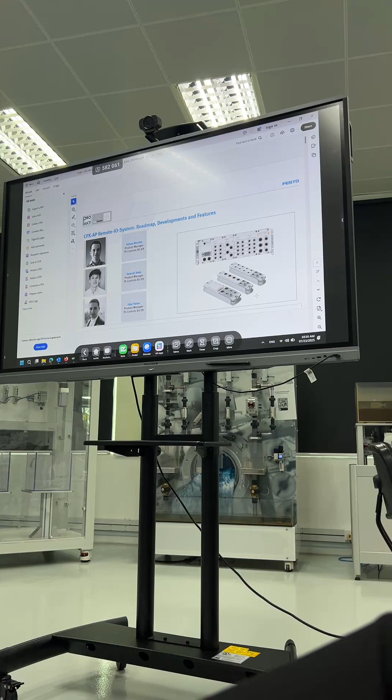For CPX APA, it will become like a modular or centralized unit. As you can see here, this is decentralized, and then we have a modular one.

This is to replace our old CPX classic system. But as mentioned, we still can't fully replace it yet, because a lot of the I/O modules are still not released. We still do not have an analog output or the NPN digital input or NPN digital output. But right now we will start to see a lot of new sales.

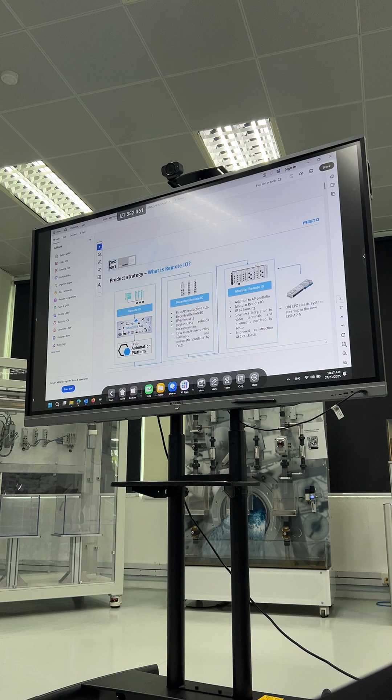So basically, for example in Vietnam, you also have a few cases about the CPX AP-I or VTUX, right? So lately we will see a lot of support regarding this kind of module.

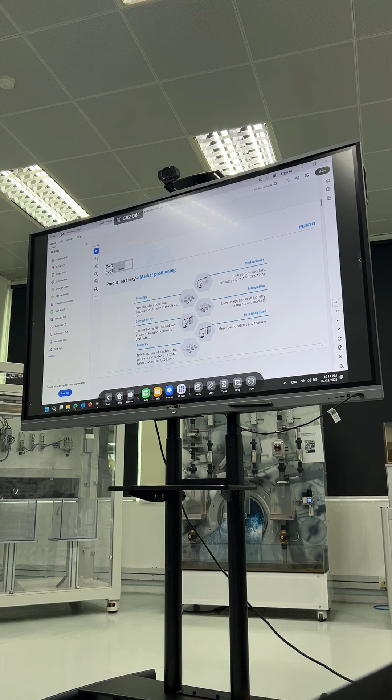So let's see this last cycle. This is the same as the CPX API. We have the same thing like the topology, compatibility, and so on. Not important. So why AP is because of lower cost and higher performance.

Then we have integration for all common PLC, like we mentioned, the EtherCAT, Profinet, Ethernet IP, and Modbus TCP. And this is also our new products, future products, and there will be a lot of improvement on it.

Such as predictive maintenance, because for VTUX we would have a life cycle there, product life, the valve life cycle. So every time you trigger it, the life cycle will count. Did Yikai mention this yesterday? So for VTUX, previously we couldn't do that with our old valve terminal, but when we use VTUX.

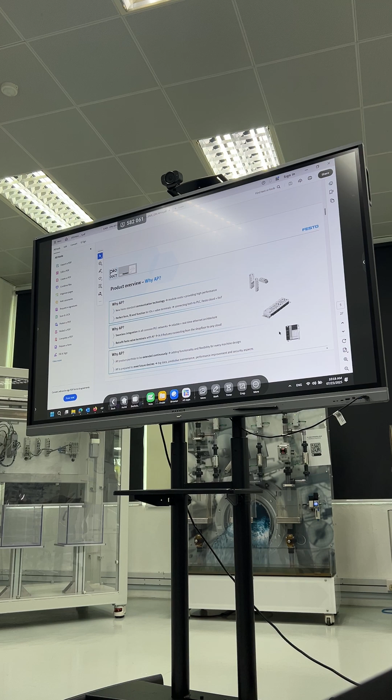Especially on the parallel one, we have two - serial and parallel. For serial, you can read a lot more information.

So one of the things for serial is that we can set what is the life cycle for the valve. For example, we set it as 100,000. After the valve has turned on and off 100,000 times, it will give us a warning.

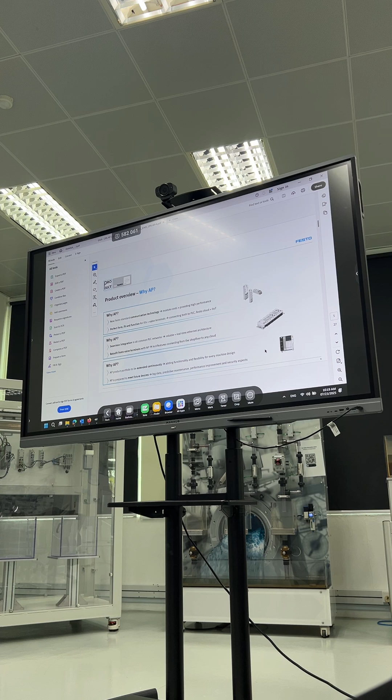So maybe that's the time you can do preventive maintenance, like replace the valve or something like that. This is something we can only do with AP communication, but if we are using the old CBus, the communication is already so limited, so we can't get more additional information like this.

So same like when we have VTUX, yesterday Yikai also mentioned that we could have attached a vacuum generator there. With vacuum generator, you could do a lot of configuration when using parallel, and all this is possible because we are using AP communication.

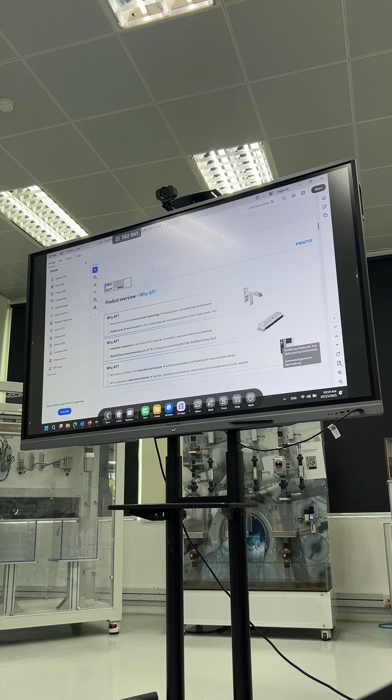If we are using the old CBus, with such limited bytes, there's a lot of things that we couldn't control. Okay, so that's why we need to use AP.

And basically for CPX AP, the setup is not just that we can only use with VTUX, you can also use with certain valve terminals like the VTSA, or the MPA-S valve terminal. But of course, when you are using this valve terminal, it is converting from AP to CBus, because these valve terminals are still using this old CBus.

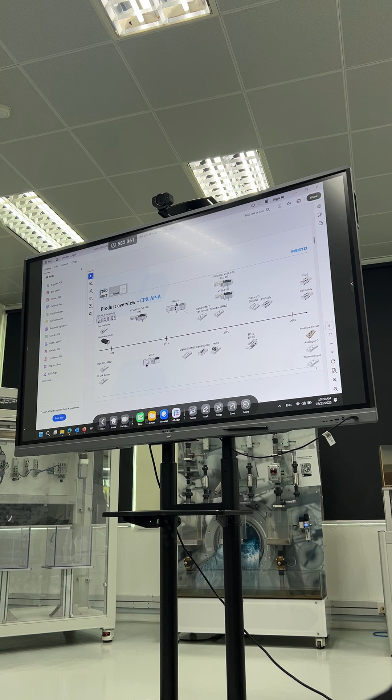Some have the new technology, but some are still using the old one. But if we are using the old one, then there's still some limitation on the valve side.

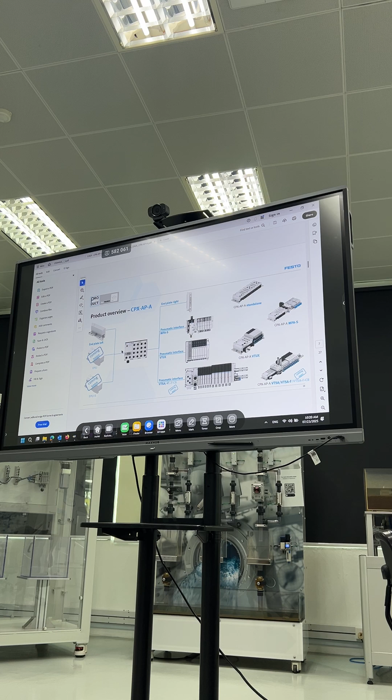But there is still a capability for your AP fieldbus to communicate with more modules. But due to its mechanical limit, you can only have up to 15 modules.

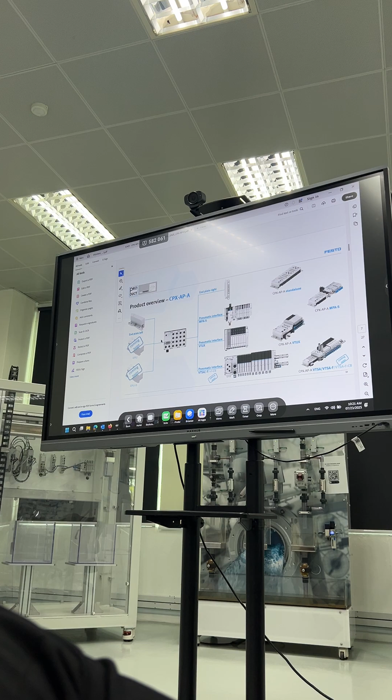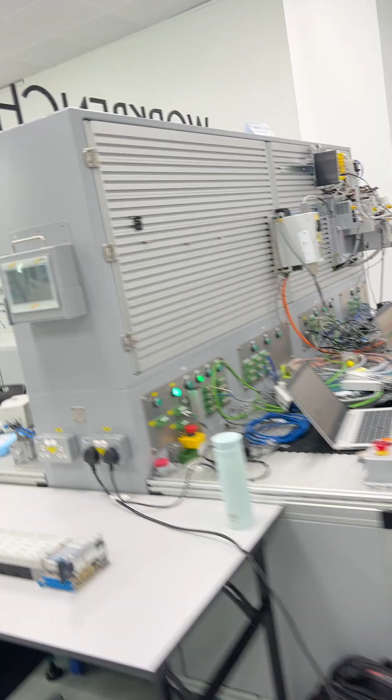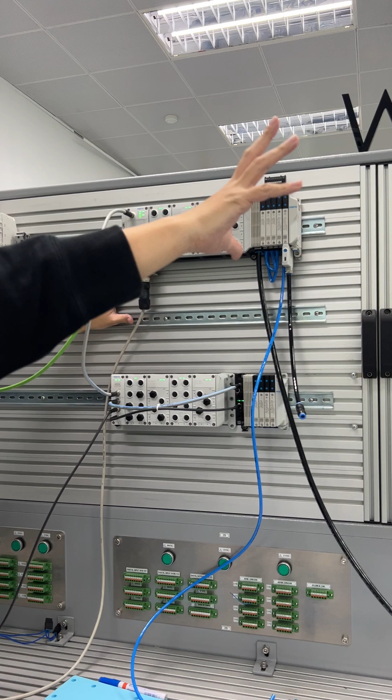So what it does is like how we mentioned with VTUX, we can communicate with AP communication also. So this is like you're connecting, for example, this set of I/O modules - it can be attached here, but if you've already reached the limit of 15 modules and still want to add additional I/O without adding a fieldbus interface, because a fieldbus interface is much more expensive compared to just an I/O module - I think the price is two or three times higher - that's why we can use this.

So this is not a fieldbus interface, it's an AP interface. So from here you have an AP communication. This port - I think last week someone asked about its function - this port is actually the AP communication. For APA, when you connect your I/O module here, this is AP communicated, but you can have the AP-com here connect out to another AP interface to increase your I/O module count.

Or you can also connect this one to the API. Because for example, you see API here, we have a power supply port and the AP-com port. So for this port, you can connect to the AP-com port, then you can have an additional decentralized unit to use together with your APA module.

Does it have any limit for the connection for each? Still like 75 - yes, so that means if you have 5 modules here, you can go out to up to 75. Or you can connect like this, but it's the same, up to 75, but we have a limitation of each set - you can only have up to 15, as mentioned just now. Is it clear? Yeah, all right.

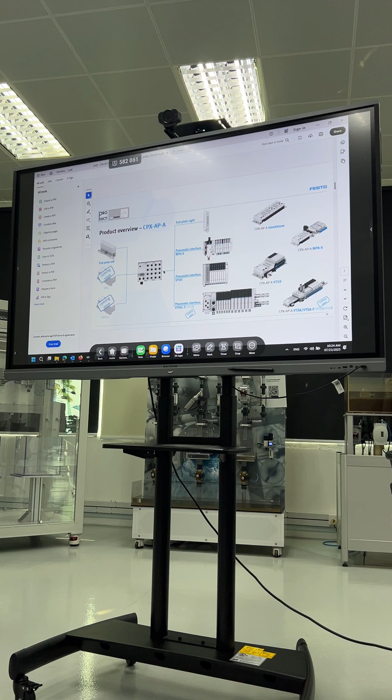So as you can see here, you can either put an end plate to end this CPX-AP-A, or connect to a pneumatic interface, which is an MPAS, or connect to VTUX or VTSA. So all this needs some module to attach it to the CPX-AP-A. When connected together, they become like CPX-AP-A with VTUX, and CPX-AP-A. So the front part, the remote I/O part, is CPX-AP-A, but the valve part is MPAS. Same here, this is CPX-AP-A and VTUX.

Okay, so these are not coming soon anymore because they're already released - this is an old slide, that's why it still says coming soon.

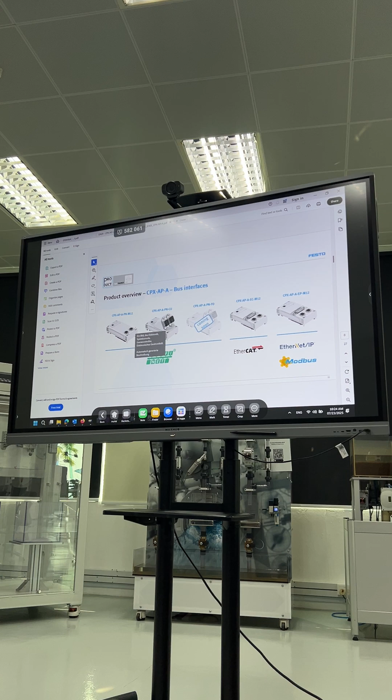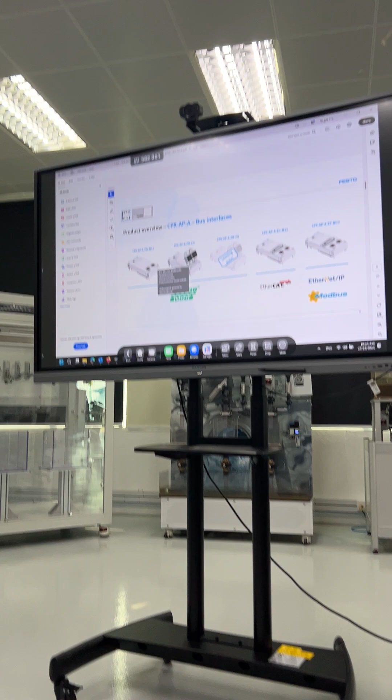So then we have the bus interface, same like the CPX-AP-I. There's a slight difference: if we have a CPX-AP-I with an EP and I want to switch to EC, I would need to switch the whole module, everything, together with the power supply. But if I have EC here and want to change to PN, I just need to take off the upper module - the sub-base is the same, it's modular for everyone. You just need to take off the interface and change to whatever interface you need, then your whole I/O module can be used for that interface already.

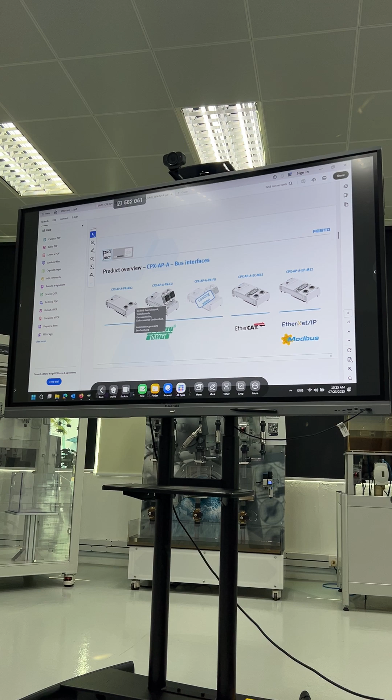Okay, also one thing about the I/O module - later you can try to take up one of it, disassemble it and play with it. It works like a Lego, I mean of course not as fragile as Lego.

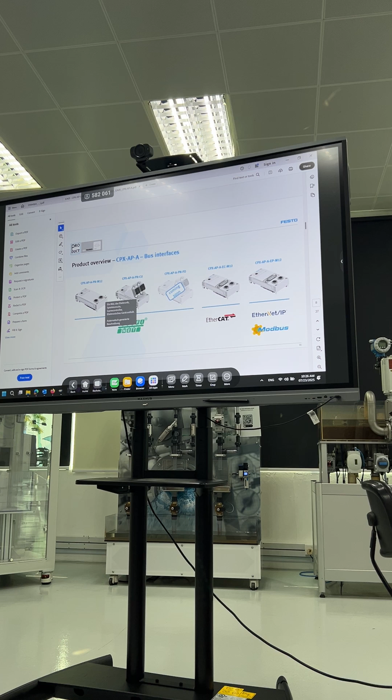But for example, if a customer today has a DI only module and wants to add a digital output module, it's very easy - later you guys can try. It's very easy for you to just detach it, add a DO module, and then install it back. Yeah, it's just like Lego, very easy to plug and play. Same goes for when they have a lot of modules and want to remove something - it's very easy for them to do that. Later you can give it a try.

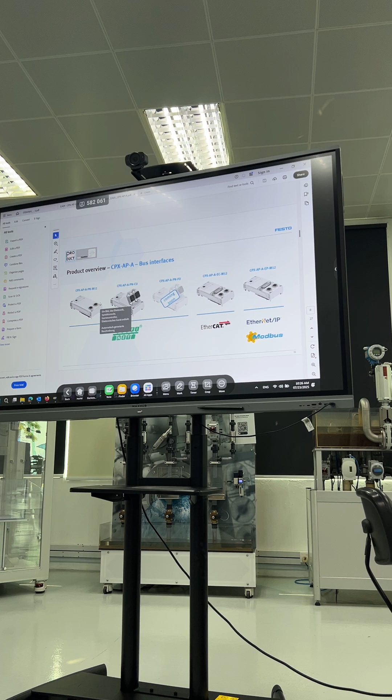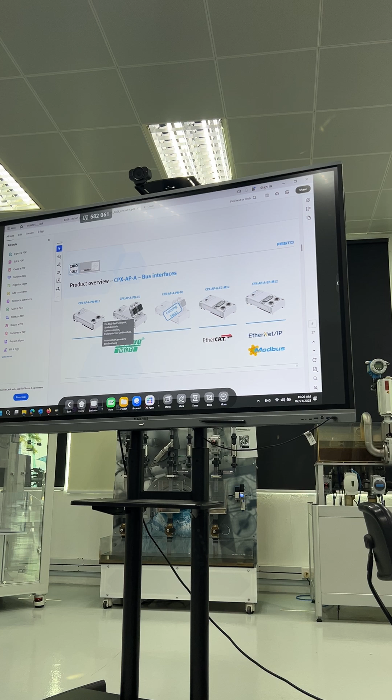But of course, there's still a screw inside that maybe they need to buy separately, the correct one. It depends - if your screw length is enough, then you don't have to buy additional screws. But if it's not enough, then maybe you need to change the screw inside. The screw I'm talking about is a horizontal screw that connects all the units together. So that's the screw where later you can take one out and give it a try.

Okay, my bad - not here, right? It's not here, the WAF has the screw. Yes, the VTUX has the screw. The CPX-AP, no - CPX-AP is just the bus. Yeah, there's a screw just for here, one for each. When you buy it, it will come together and you can just install it. Later, you can give it a try. The screw I'm talking about is for VTUX. So when you have more WAF, you need to add the screw. You might need to add the screw.

Okay, so then we have the power supply down here, the base - all this is just different standards, like M18, M12, L5 pin, or whatever, depending on what the customer wants to use. The difference is that this is a single supply, then we have something called forwarding supply. Forwarding supply means there is an in and an out, so you could connect the out to another APM module, or connect it to the API.

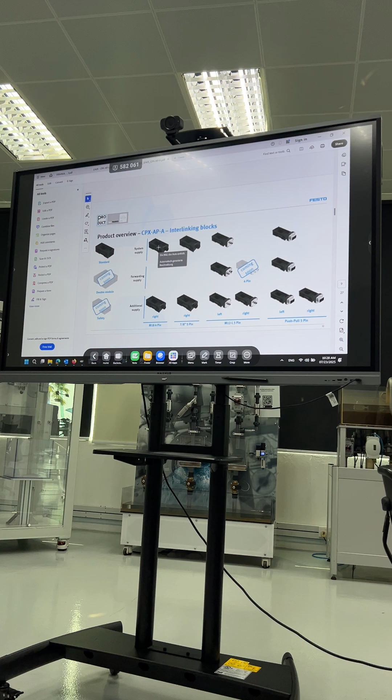Then you could also have additional supply. This means that, as we mentioned, there's a limit of up to 16 amp. But if the customer uses too much and it's not enough, then behind it they can add another additional supply for the WAF or for the digital output here.

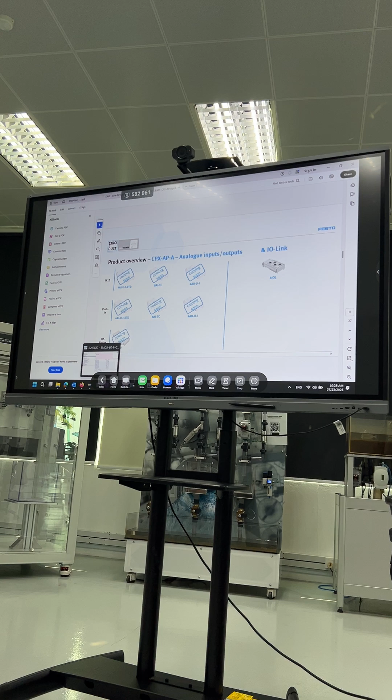Yeah, these are the modules that we currently have. I think some of the coming soon items are already released, okay, for digital input and output. For analog input, let me see - I think we already have the analog input module. But the thing is, the reason we say we still can't completely replace the CPX is because we still do not have an analog output.

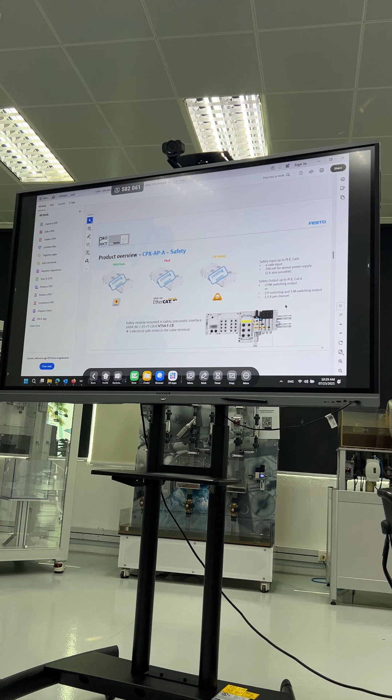Then, same thing as the API just now - basically these are just future developments. We are not sure when they will have it yet.

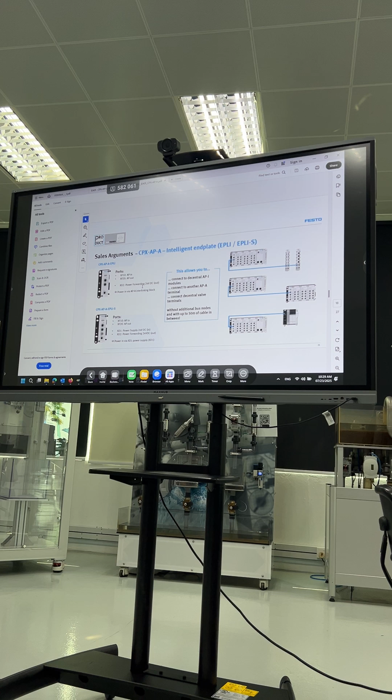About this, for EPL we have two different types, whether it's EPLI or EPLI-S. The difference is just whether it has a power supply output. So you see there's APE, APR, APE, APR - there's a power supply in and a power supply out. This one we have only power supply - it should be power supply in, I believe. Maybe it's written wrongly here.

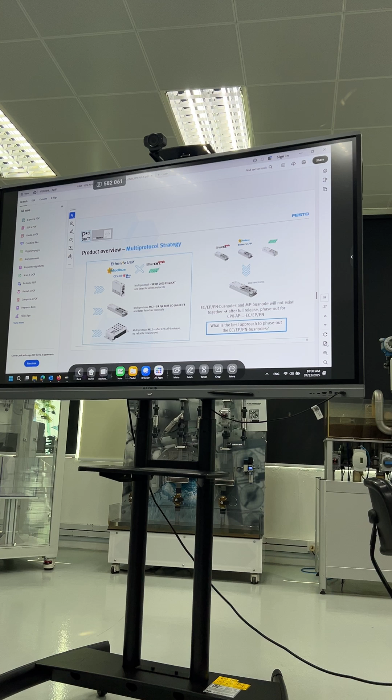According to this, they are planning to have multi-protocol for our CPX-AP-I also, but we're not sure when we will have it. Right now, for each module, we still need to buy it separately. So if we have a multi-protocol like our CMMT, it's good because you just need to buy one module, and like our CMMT, you can just switch the field bus according to your needs with just one same part number.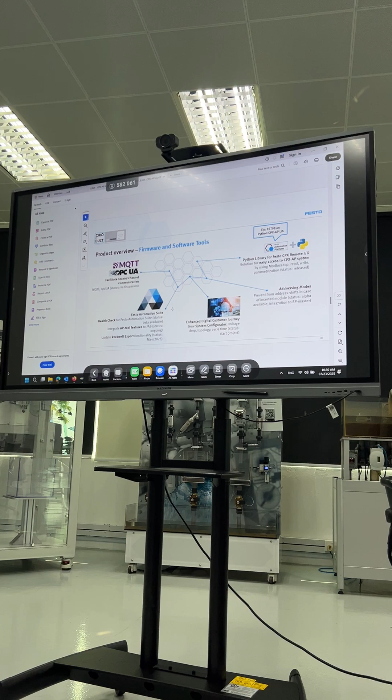Okay, and these are just some examples. We could have used FAS to connect - just like the API, we can use FAS to connect to it.

For our remote I/O, we actually have a Python library, so you could use the Python library and straight away connect to our CPX-AP I/O module to control it. There are some addressing notes, like you can see the address of the EtherNet/IP or the Modbus TCP address. We also support MQTT communication, but to be honest, I haven't tried it yet.

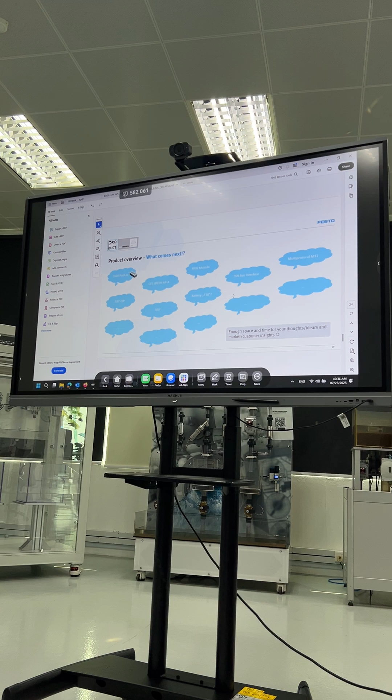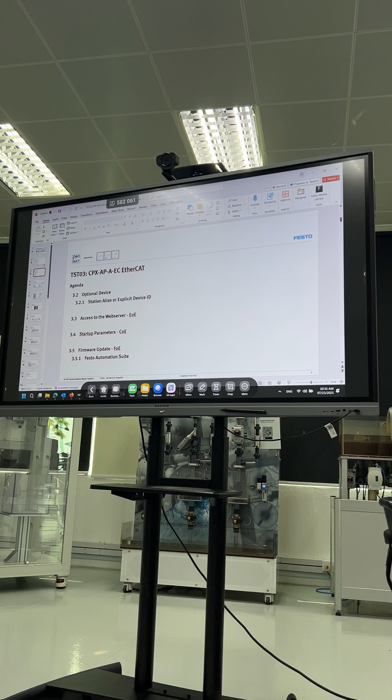Okay, so we have some examples - I'll go through quickly here because I think it's better that you guys can try it out yourselves. This is when we are using CPX-AP-A-EC with, let's say, our PLC. As mentioned, later I'll send this to you so you can see there's some comparison of why we are changing to the AP system.

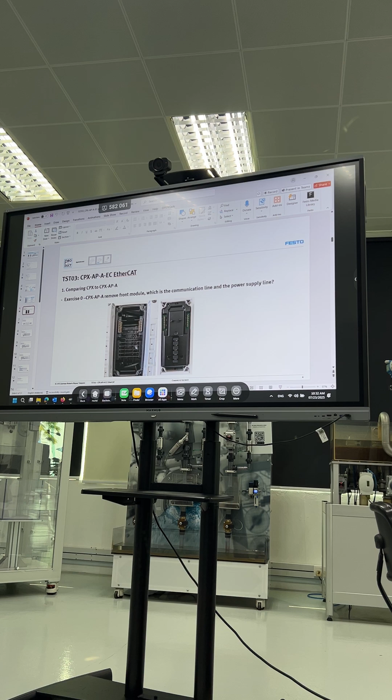So yeah, if you open the device, this is just a question for you to identify - later you guys can try to open it and see for yourself how the structure looks like inside.

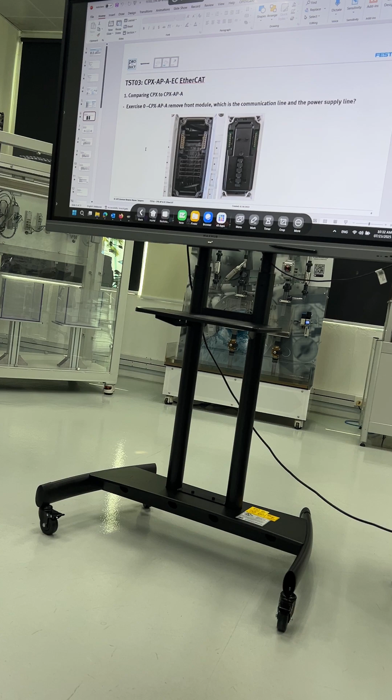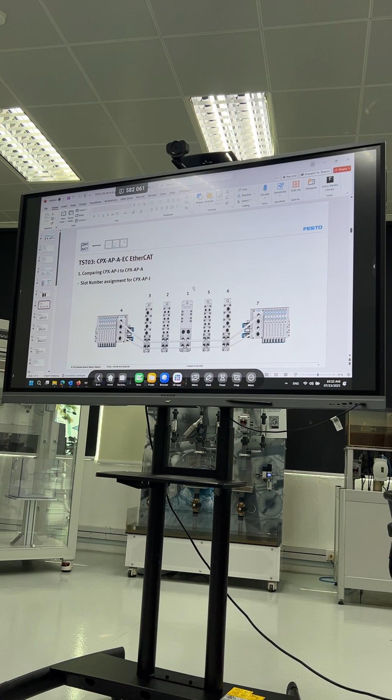When we connect with CPX AP, we need to know how the slot number is assigned. When you connect to remote I/O, your first module will have the first I/O address, so you need to identify which is your first module. For CPX AP, the first module is always the interface module. The second module starts from the AP COM on the left port, continuing 2, 3, 4 until it ends, then we count from the right port as 5, 6, 7, and so on. This way you can identify how it is arranged.

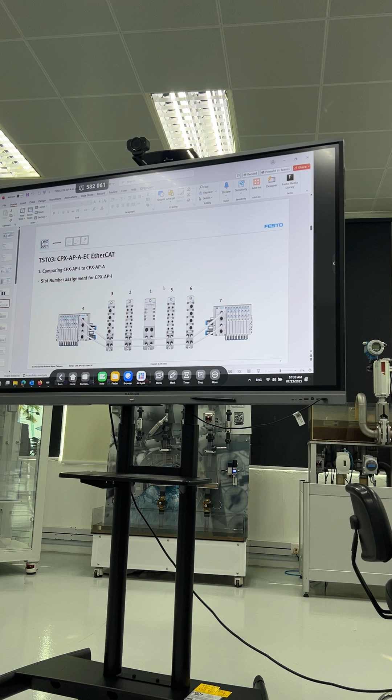But of course, you can also connect straight to the web server, and it will show you how it was arranged.

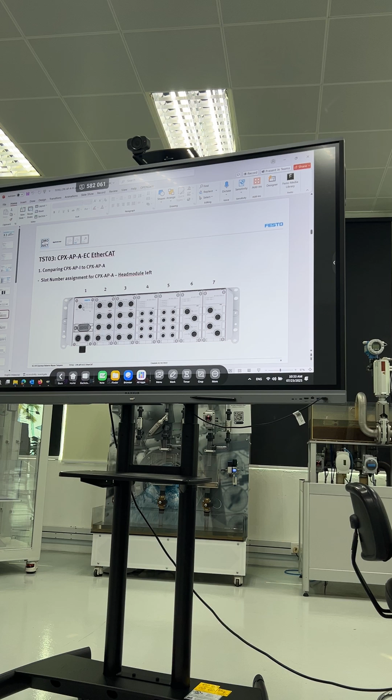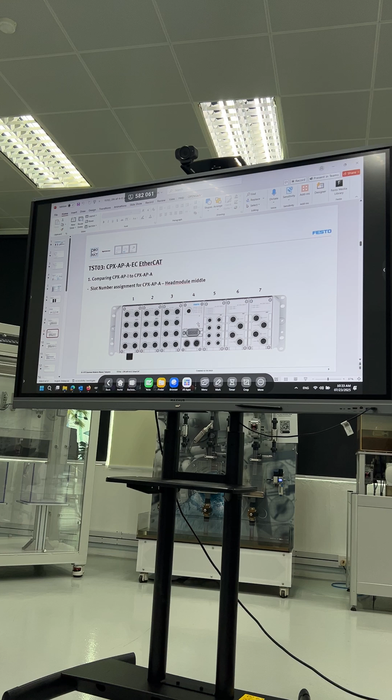Same for AP A. If your field bus is on the left side, it will start from 1, 2, 3, 4, 5, 6, 7, continuously like this. But your AP device does not necessarily have to be the first module, it can be in the middle as well. The calculation is still the same, starting from the first device of the I/O module.

So it's different with AP: there you see from the left and right. For AP-A, you see from your whole set, meaning the first module will be the digital input or digital output module.

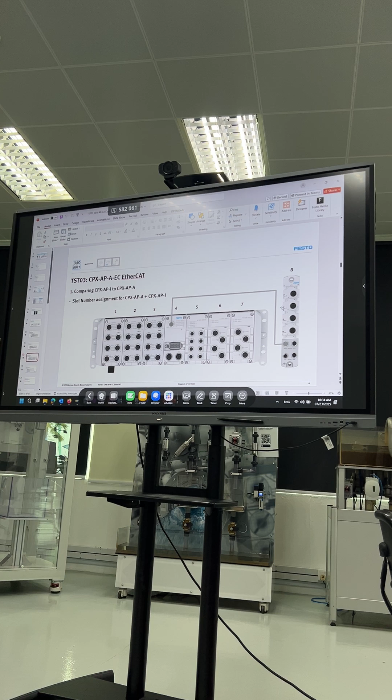So what if you have an additional AP module outside? How it calculates is that it will count your base module first, from 1 to 7, then only go to the AP. So the AP will be last. If you have an additional AP, then it will be 8, 9, 10.

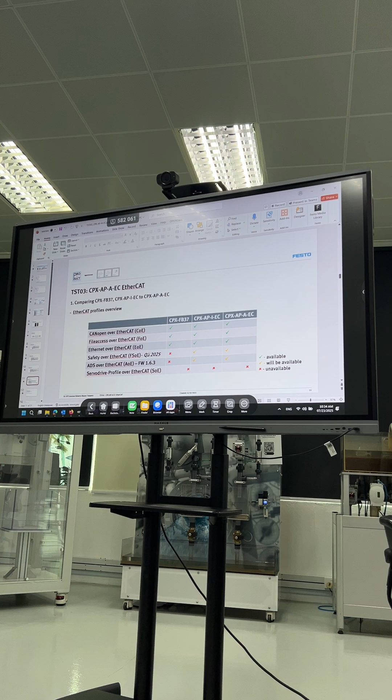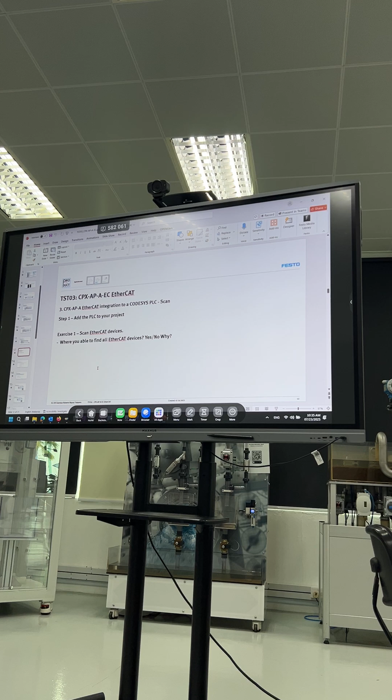Here is an exercise you can follow when connecting with a PLC, where you try to scan your network device to get all the modules. I think I will not go through this, maybe you guys can, I'll send this to you later. You can try it with our PLC, maybe the CPX-E-CEC, and try it out.

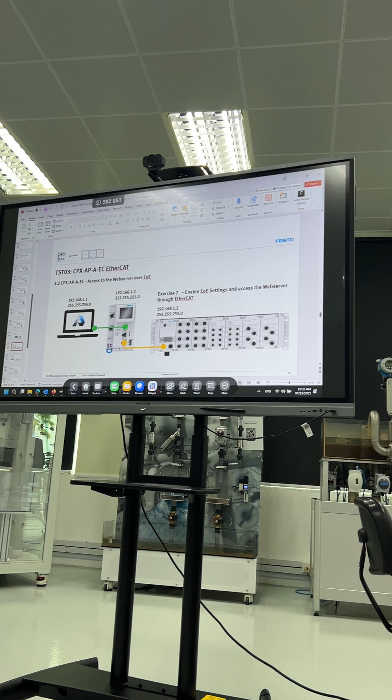As mentioned, this is access to the web server over EOE. With this, you can enable the EOE and then connect to the web server. Did it show you how to do it? I think you did, let's see... it didn't. Okay, then later I can show you.

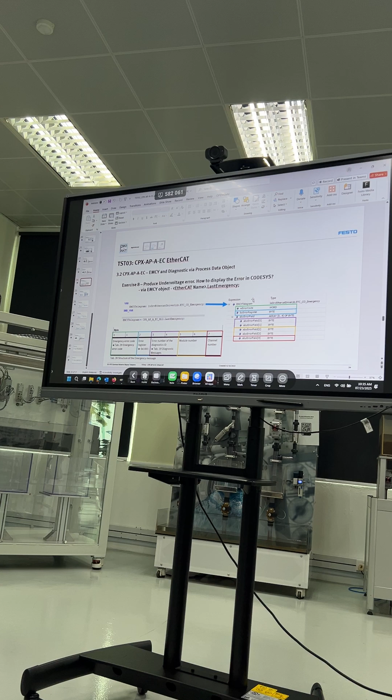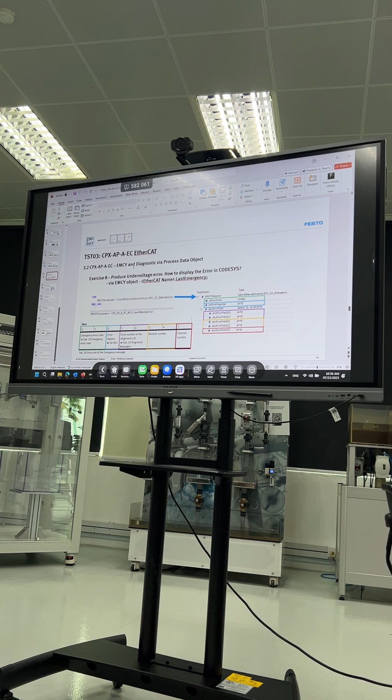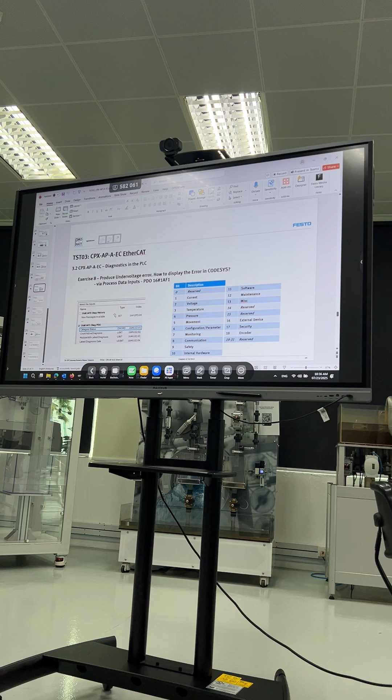We also have this EMCY diagnostic. EMCY is a diagnostic that if we have an error on our CPX AP, it will give a signal to your PLC, and this way you can identify what error is happening on the EtherCAT slave. I won't go through details here, you guys try it, and if you face any issue, you can ask me.

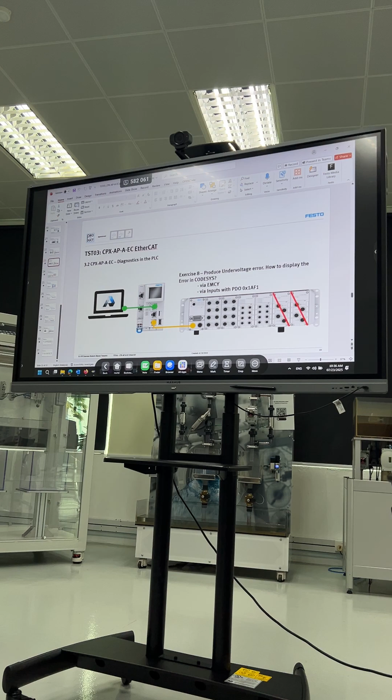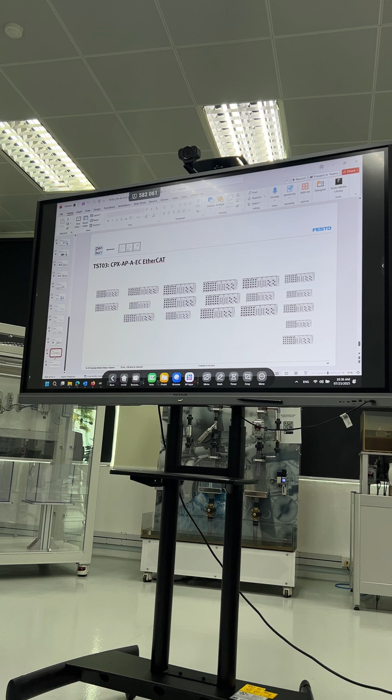It did mention here what you need to see already. The only thing is it did not mention about the EOE, but I can show you guys how to enable the EOE later on. We also mentioned that we have backdoor access, so you can connect to the output, assign the IP address, access the web server, and also connect it with your FAS. So that's for EtherCAT.

Then we also have one for Profinet. Same thing, it gives you an overview of how Profinet works and what you can do with Profinet. Later you can try to configure this with our Siemens PLC.

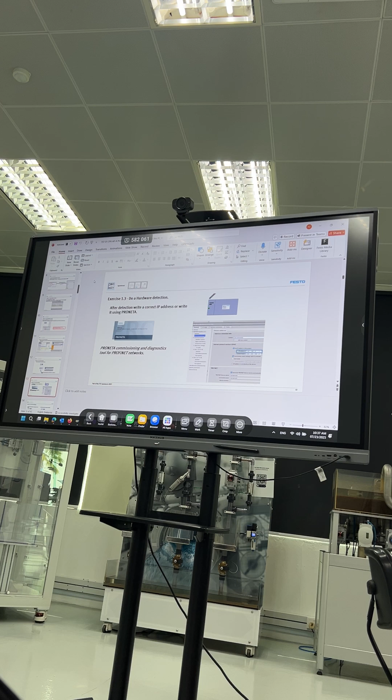You can try to connect, then do some configuration or access the web server. Basically, you just follow the exercise here, and it will show the solution as well.

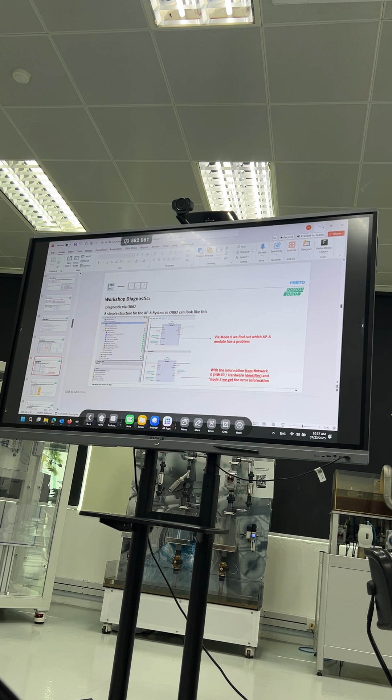Then after Profinet, we also have Ethernet IP, but in this case they are using Rockwell. With a Rockwell PLC, they can do a lot more, but we don't have a Rockwell PLC.

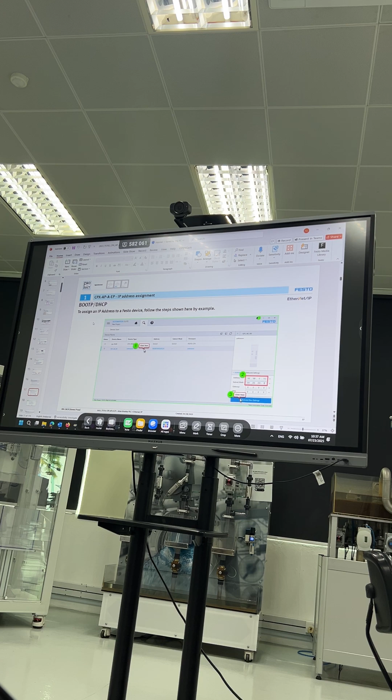But you can still try to connect maybe with a TIA PLC to the CPX APA, to give it a try. It did mention you can set the IP address here, or you can change the IP address from your FAS.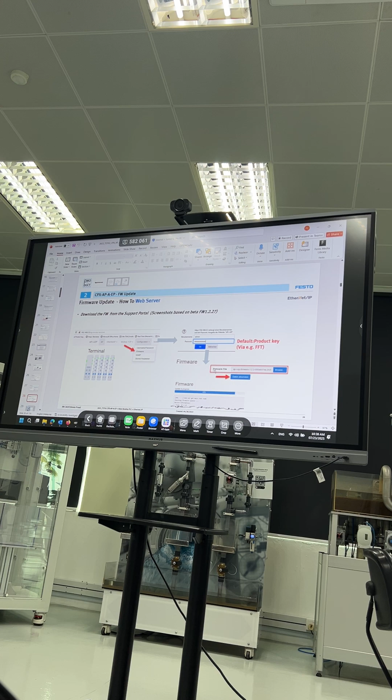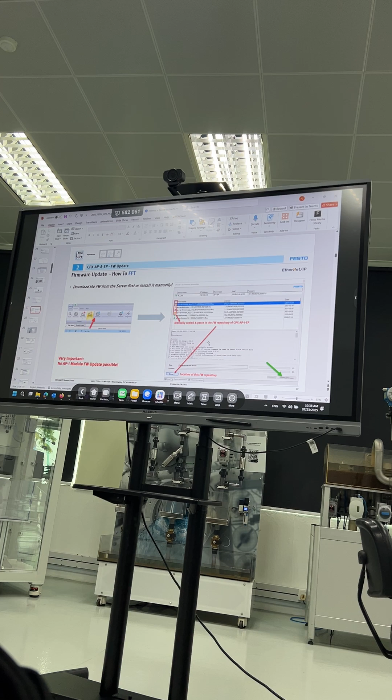How you can do the firmware update, whether through FAS, through FFT, or through the web server - some way of doing upgrading firmware. You guys can give it a try, to familiarize yourself. Regarding the RSLogix, you guys can just skip that because we do not have an Allen Bradley PLC, but for the other parts, yeah, you can give it a try.

For example, in the web server, where you connect it with Ethernet IP or Modbus, you can find the register view here, how it looks like - all these things. But again, this is mainly for Allen Bradley. You can have a look.

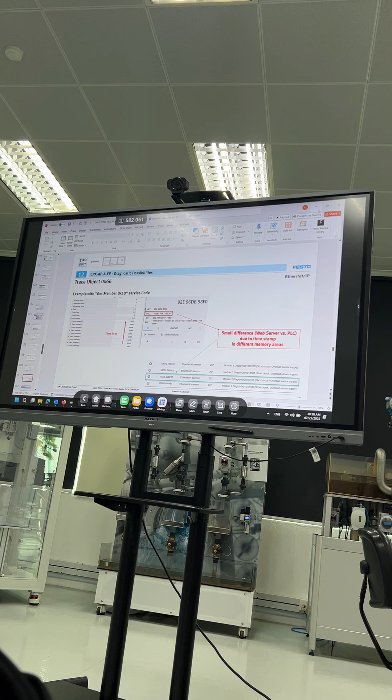Then, okay, we also have one for IO-Link. Using IO-Link, let's say we want to connect, you could take one of the IO-Link devices that we have, any IO-Link device, then try with IO-Link. You guys have a brief idea of what IO-Link is, right? So basically, IO-Link is a type of communication.

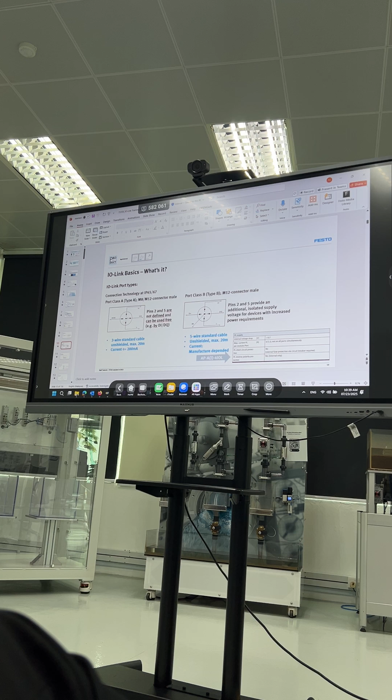Normally for IO-Link, we separate it into Port Class A and Port Class B. Port Class A is without power supply, and Port Class B is with power supply. So our IO-Link master is all Port Class B.

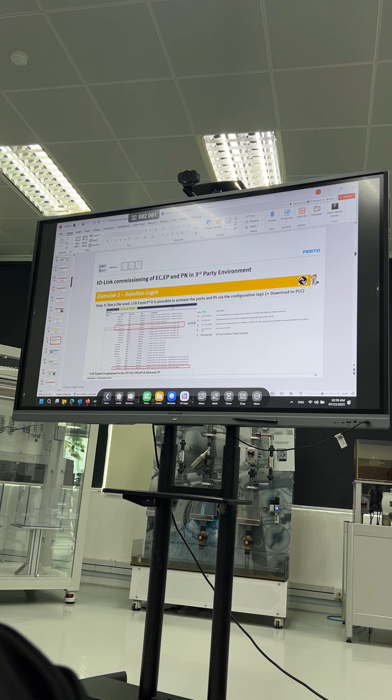Then in the configuration, you could configure the IP address - and I think there is some way for you to... okay, never mind, it's not showing. When you connect with FAS, there is a parameter that you need to configure for it to have the power supply output, because this is just for safety purposes.

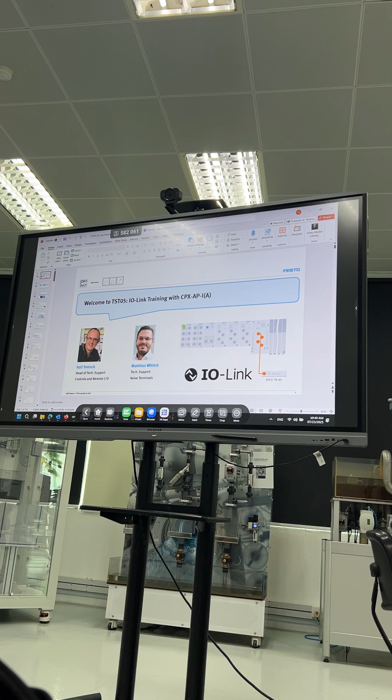We don't want people to randomly connect a Port Class A device to our Port Class B, because then it might spoil their IO device or whatever. So that's why there is an enable button that you need to enable for it to have the power supply output to the IO-Link device.

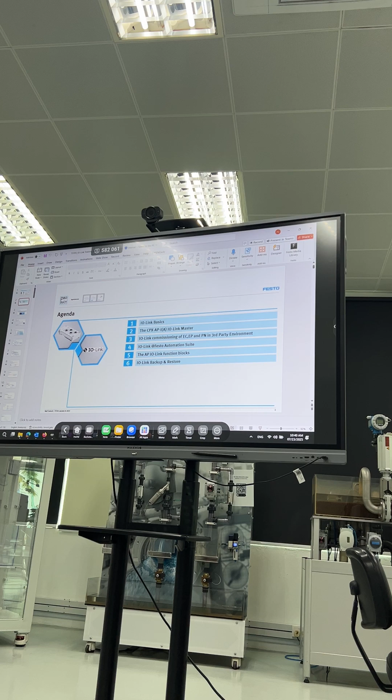Okay, so yeah, this one - do you guys know about ISDU, the service data? Any idea? No.

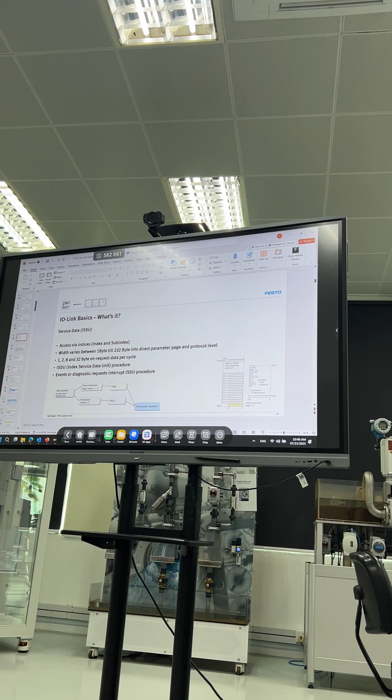For an IO-Link device, when we use the IO-Link master to communicate with the IO-Link device, normally it communicates through what we call process data - for example, your IO-Link device would mention that it has a 2-byte input. That's the process data that you are getting cyclically.

But ISDU is more like acyclic data - for example, if you have a pressure sensor, your current reading is in bar. But for most of our pressure sensors, you can change the display unit to whether you want bar, kPa, or millibar, for example.

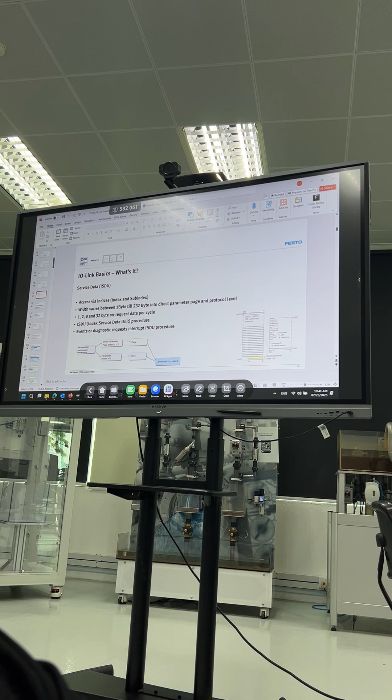Then you could use the ISDU as acyclic data to override this value - to change this parameter, say from reading in bar, you can change it to kPa, and then your process data will change to kPa as well. So that's what we call ISDU.

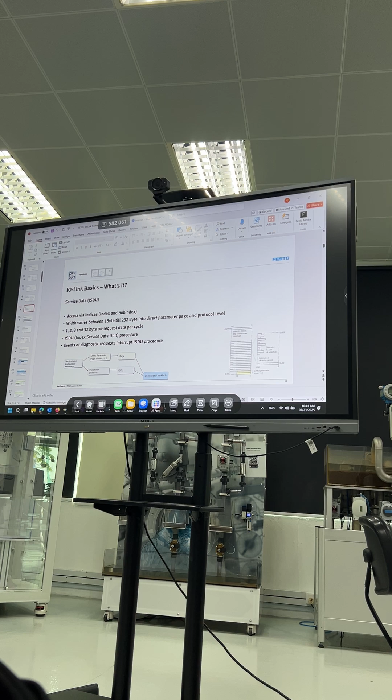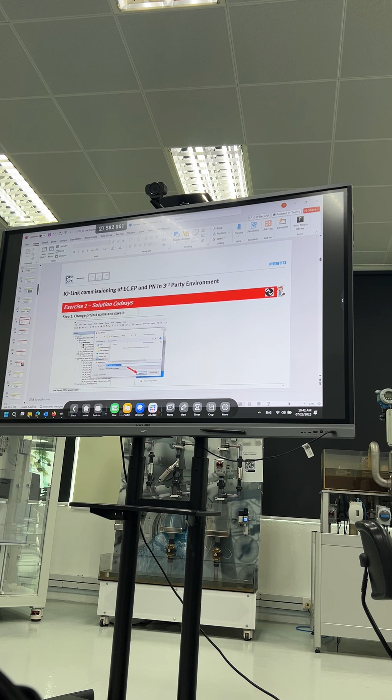So that means, other than the process data, you could change the parameter inside your IO-Link device through the IO-Link communication. I believe inside here there's some exercise with a solution, like how you can do it with either Codesys or TIA. I'll leave it to you guys to look at later on - if you have any questions, you can ask me.

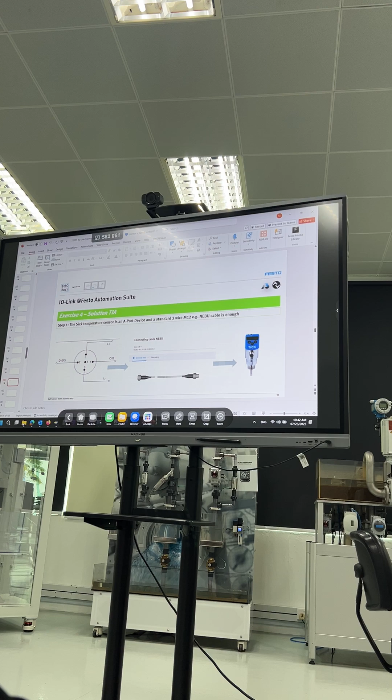Because I think these are things you need to try yourself, you need to do it yourself so that you will remember. So yeah, this is basically all of the IO-Link.

Okay, I think that's the exercise for today - now you try with EtherCAT. So the three different exercises that we have are EtherCAT, Ethernet IP, and Profinet. You try with each different PLC to communicate with our CPX-AP-A - it can be whatever, you can just plug and play yourself later on.